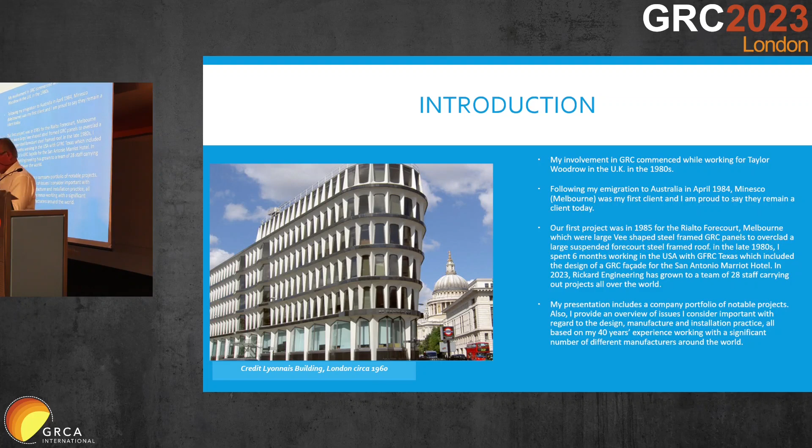If you don't allow for all these little things in your manufacturing, we can't actually afford to reduce the Pilkington rules, in my opinion. We have to understand there's an integral connection between QA and saying that 50% reduction from 21 to 10.5 is bloody ridiculous. I agree it is, but you understand what I'm trying to say—we've got to make sure we understand when the material is vulnerable and what we need to do.

Okay, here endeth the lesson. Let's move on and have a bit less of that.

So, things that I've designed with—how am I going, Mr. Chairman? How many minutes? Five minutes left.

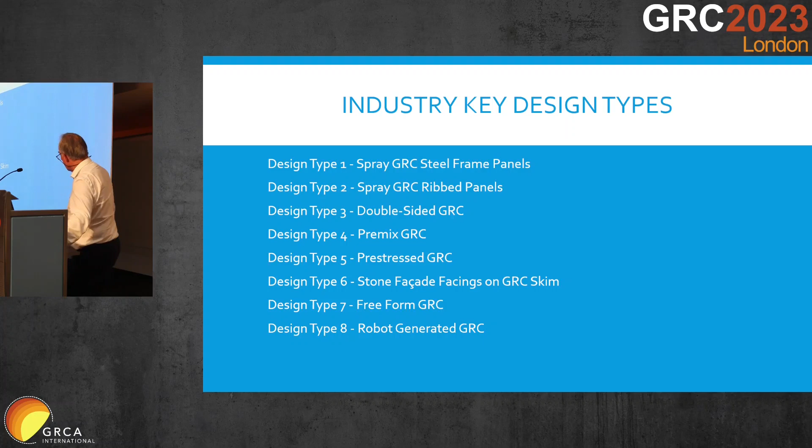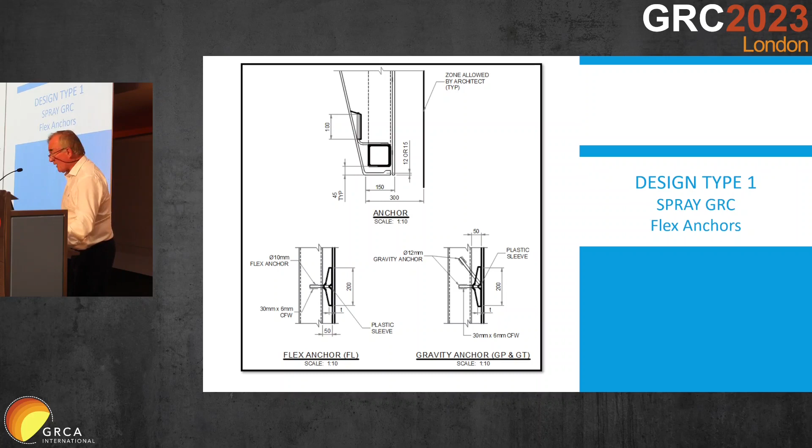Okay, different types of panels: steel frame panels, flex anchors and gravity anchors. We separate flex anchors to allow for movement, and gravity anchors to take the dead load. I've done panels up to 9 metres long by 3 metres high.

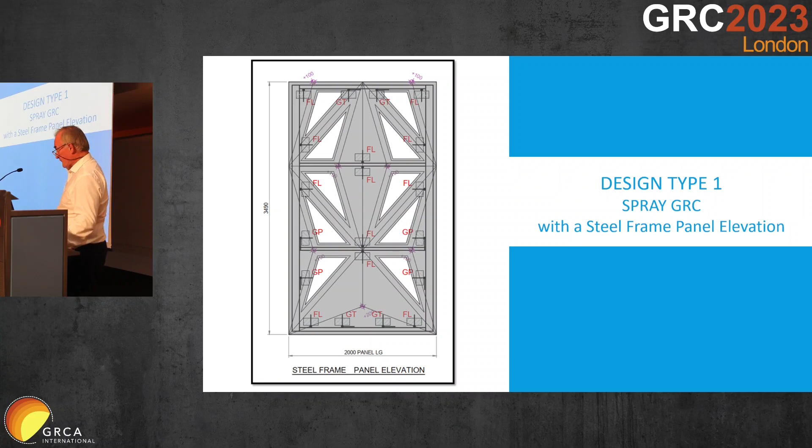This is a picture of a panel being done at the moment at the IICC in India, a massive project, very sexy panel with lots of holes in it—steel frame, flex anchors. That's definitely the premier system, and you'd certainly want to use a steel frame on anything 9 metres long. Here's some pictures of it under construction, supplied by Al Tasnim. Thank you, Al.

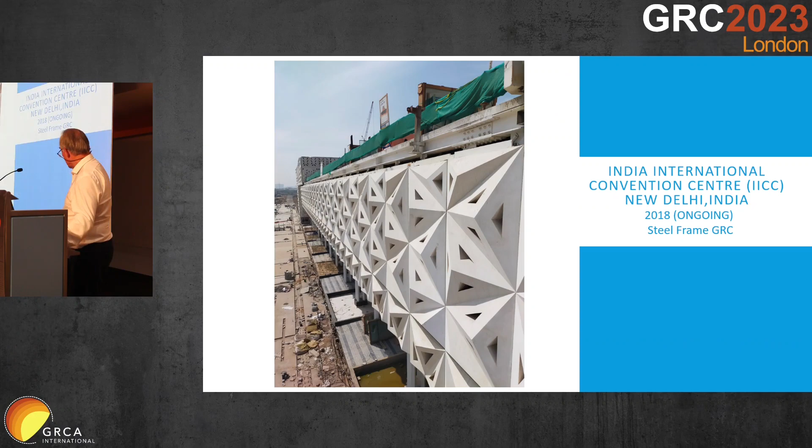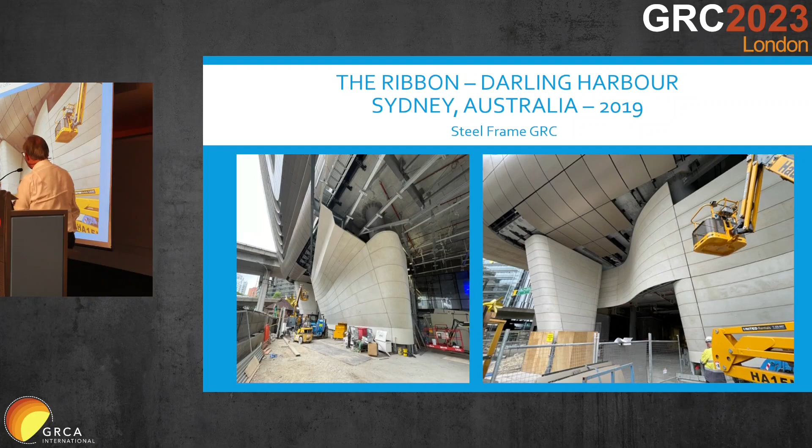Okay, this is a job in Sydney with curved ribbon panels—big, long, I think 8 metres long, curved GRC panels on a steel subframe. Here's the steel subframe behind it, quite substantial. I've only got 5 minutes, so I'll keep batting on.

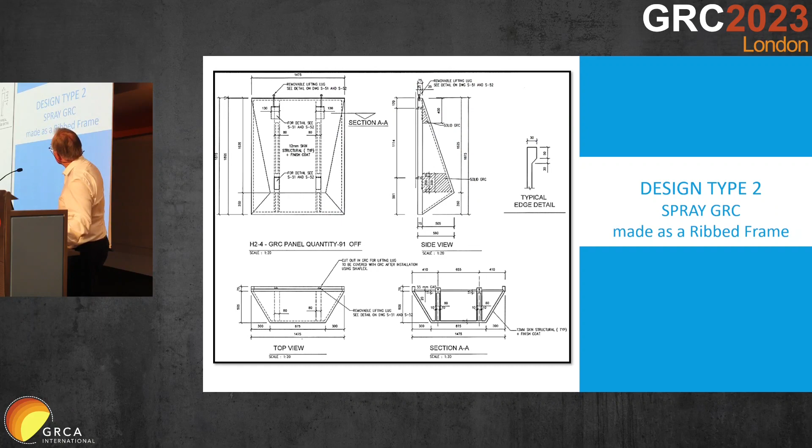Got to bat on a bit. This is something I'm particularly proud of, though I have to be honest and say I think the idea originally came out of England, but it's a project I'm very proud of—Redco GRC in Doha, back in the late 90s. These panels are all solid GRC in the Queen's Palace.

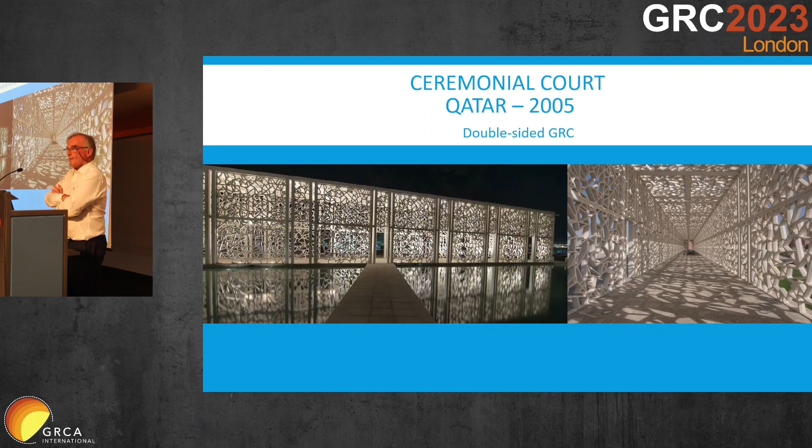We had a rubber mould and made half a panel in it. We put stainless steel pins into that half of the panel, then took the panel out of the mould. We then sprayed the second half and lowered the first half into the wet GRC, and they've never separated.

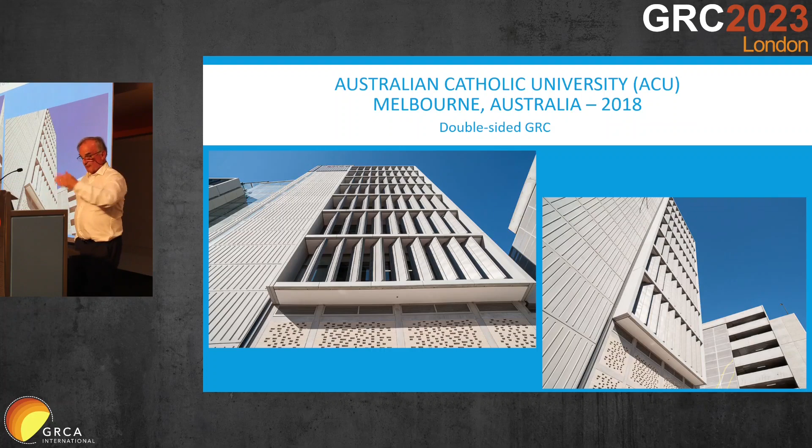Two-sided GRC panels—these are made by GRC Environments in Melbourne, and they use them for all manner of things. Sometimes they use them as party walls between units—you know how you've got units on one floor and they want a division on the balcony? Well, we make these double-sided panels.

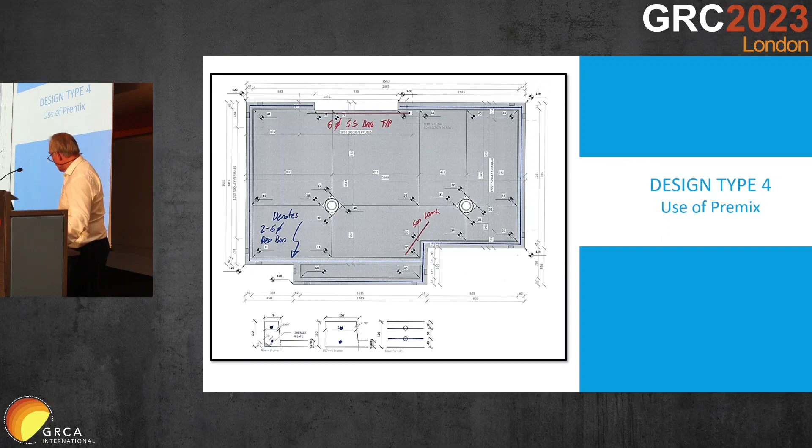Bathroom floors—now I'm moving into premix. Bathroom floors have taken off like Topsy in China and Australia. They build a GRC floor, build up all the walls, and then crane it in. There's Mascot Engineering, the most successful GRC company in Australia—all they do is pods.

Here's the prefabricated bathroom—that's the floor. Here it is being craned into position. The beauty of prefab bathrooms is the GRC is only going to get stressed for about 12 months, and then it'll be sitting on a concrete slab, so I don't have to worry about long-term creep.

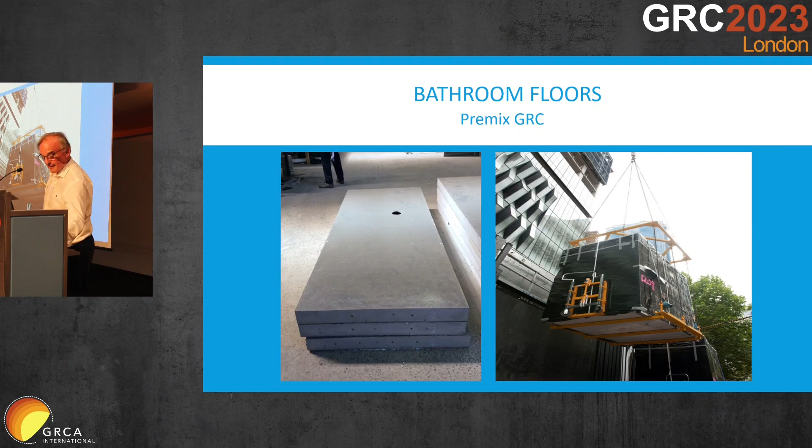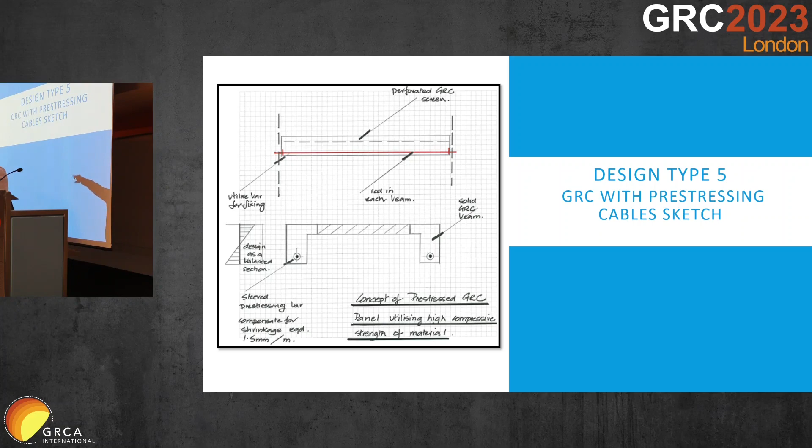I've done one job with pre-stress. I've heard of a company in America that does pre-stress GRC. It's a really simple design - you've got 2 ribs, you can see the black dots down the bottom, they've got steel bars through them. It's a perforated top, and it's never fallen down yet.

When I was in the States, they were doing a job in Fort Worth. They were laying stone in the mould. They had stainless steel clips, pushed plastic sheet onto the clips. And then they sprayed up the GRC behind the stone, lowered the steel frame onto the GRC and tied the steel frame to the GRC.

This is the detail which I need to put into the Australian code of practice. So here's your stone, 10-15 millimeters thick, plastic separator, stainless steel clip into GRC. What was amazing about those panels is they followed the same process of manufacture as if there was no stone on the panels. I was absolutely gobsmacked. I stood there the first time watching this panel get lifted out of the mould with the stone facing attached to it, and it's only 13 hours old. Incredible - never been a problem.

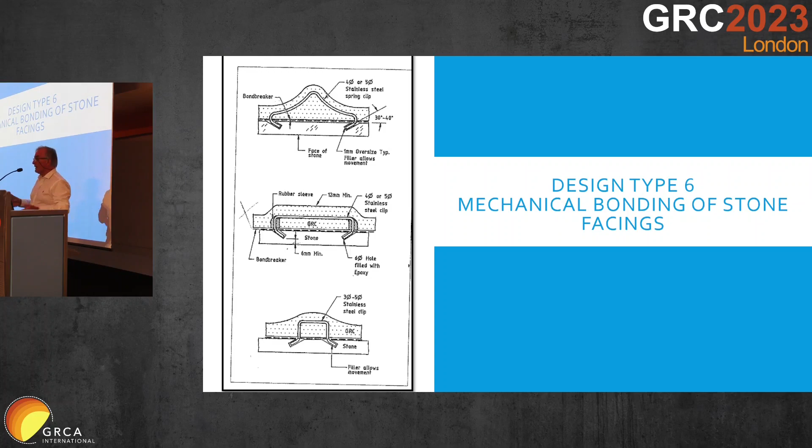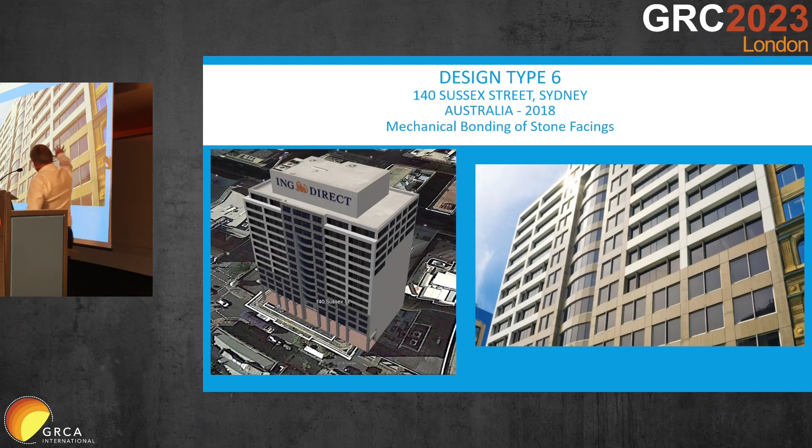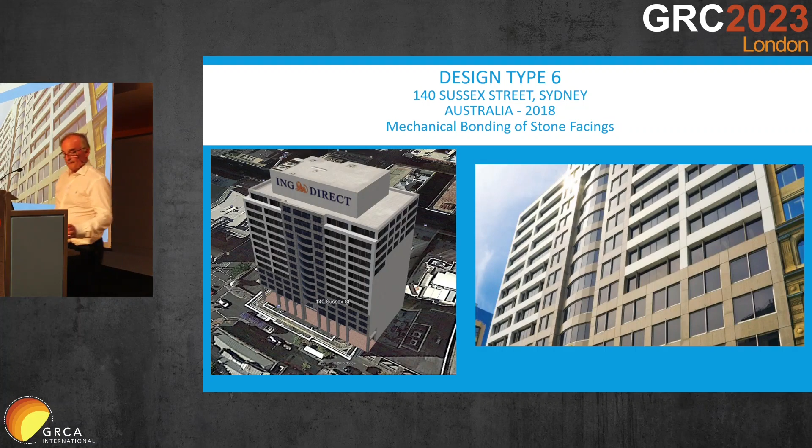This building here is in Sydney, done with precast concrete from Brisbane. This is all the stone cladding, mechanically tied to the GRC. So you've got some GRC panels which are no facing, and then you've got the fancy facing. ING Direct bought it 3 years ago and made alterations. We actually got to cut up some of the panels - perfect, never had a problem with them.

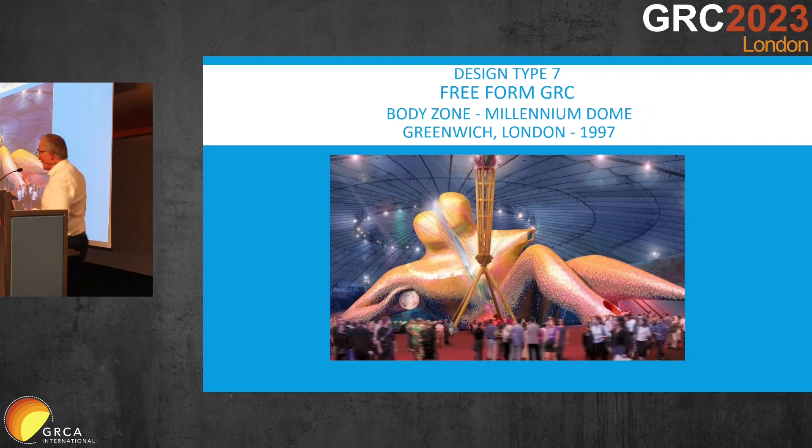Okay, very quickly, how am I going? Body zone - some of you who went to the Millennium Dome, this is the body zone, which was GRC, sprayed by Glen Industries from Adelaide, designed by Charlie on a steel frame, done by Buro Happold, I think it was.

This is my pride and joy, but the buggers have just knocked it down in Singapore. Lee Kuan Yew's dead - a 37-metre high, sprayed on site GRC, and there's not a single joint in the GRC, by the way. I wanted joints, and Glen Industries said don't need them. There's never been a crack in it. They've knocked it down now.

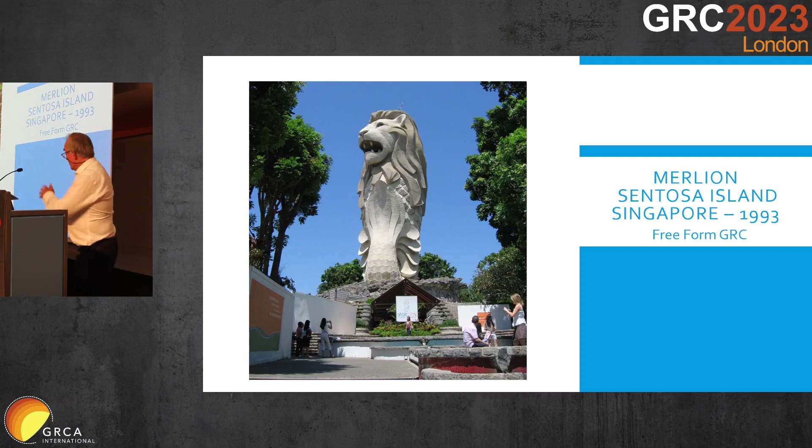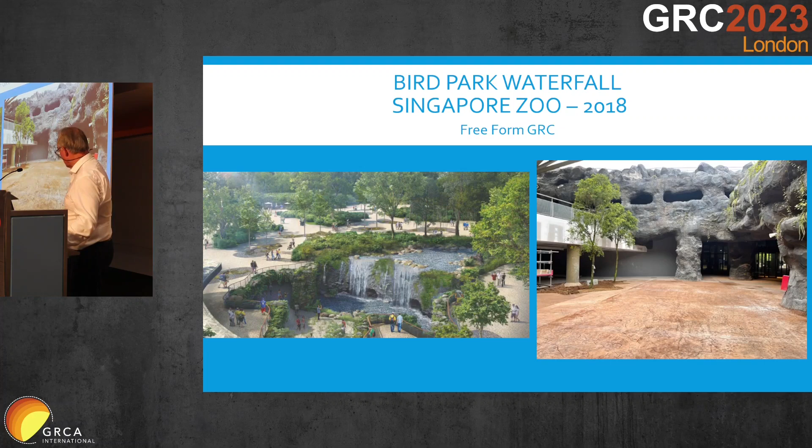Pico in Singapore are doing a huge amount of work in the zoo, so these are some pictures of that. I had to go and do it. And then finally - everyone keeps saying that, don't they, when they get up here?

Robots. Take the best grade of polystyrene you can find, cut it with the CNC machine to what you want to do. Can you see the ripples in the GRC? This is because these were 15 monuments in Melbourne that someone threw a white sheet over. They then created a 3D model of it, and the polystyrene block then had GRC sprayed on it, put on the turntable. The robot was programmed to the 3D model, and the robot went around the GRC, chip, chip, chip, chip, chip, chip, created perfect millimetre accuracy of the 3D model.

Then Gino came on - had to be an Italian, didn't it? Gino came on and hand-glove finished the GRC, and these are done like an old stonemason. These are blocks that are stacked on top of each other.

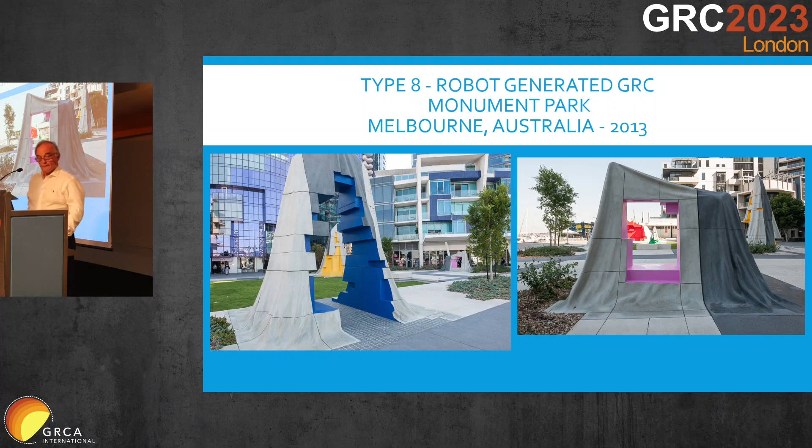And then someone said to me, Charlie, we're going to have skateboards attacking these monuments, what are you going to do? So I cored holes in the polystyrene and created reinforced concrete columns, having placed all the blocks on top. So inside those things are reinforced concrete columns to hold the whole thing together when the skateboarders start attacking it. I think I've discussed all that.

One thing quickly - you've got to understand GRC isn't just about dead load and wind load, it's about building movements. I've come across facades where people are taking single-skin GRC, putting 16 blobs of concrete GRC on the back of it, and then fixing it off on the building. No! GRC panels have to have a maximum of 4 to 6 fixings. You have a gravity fixing, and the other fixings have got to allow for building deflections, slab deflections, foundation movements. That job in Manchester is a nightmare, and I don't know when it'll get sorted out.

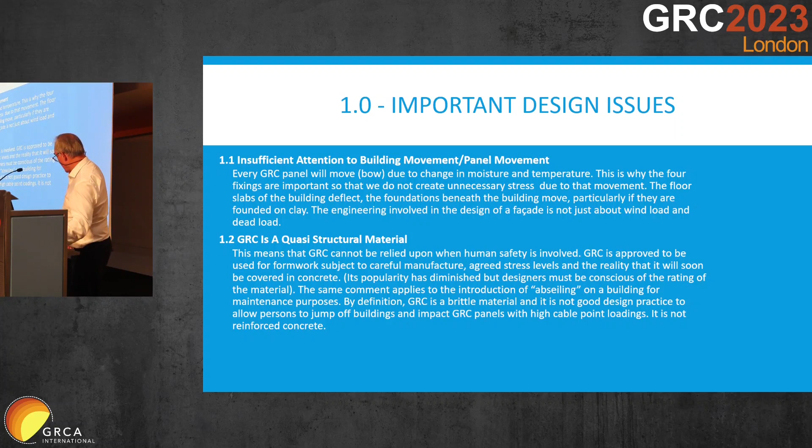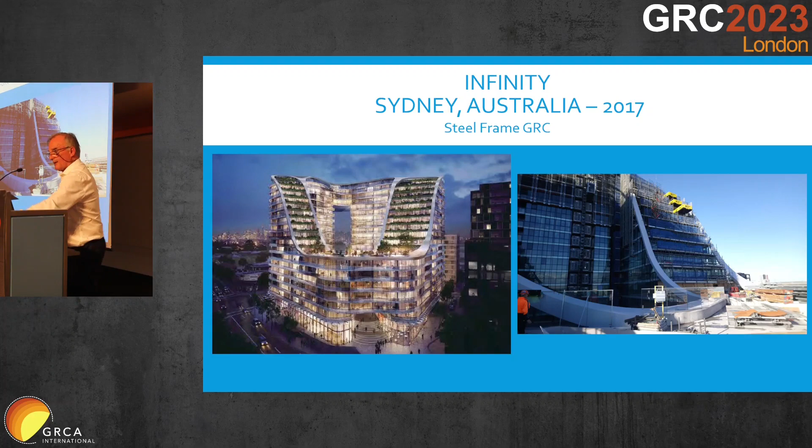Shrinkage and temperature I've talked about. The boys talked yesterday about QA control, and then there's a lot more, which you'll find if you read that, if you Google me or email me, and I can show you the rest of the pictures. Thank you very much.